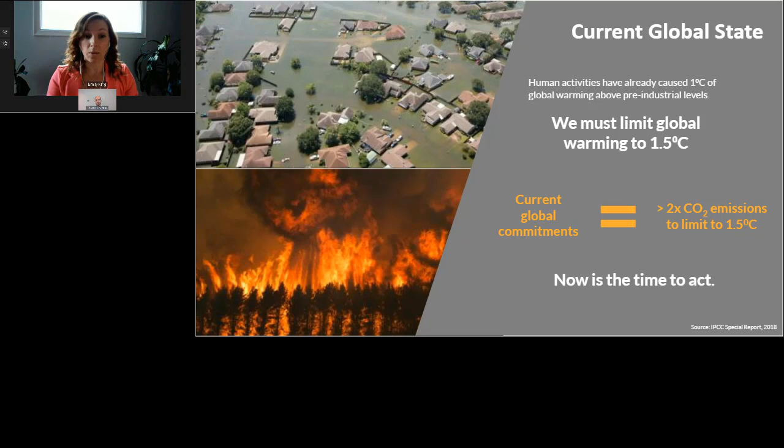So we know the planet's warming, we know we need to limit the warming to 1.5 degrees, but what does that mean for emissions reductions? So the IPCC report indicates that we need to reduce those emissions to 25 gigatons of CO2 equivalent by 2030, which is a 45% decrease from 2010 levels. And we need to be net zero by 2050 in order to limit global warming to 1.5 degrees increase above pre-industrial levels. So that means that we need to have a 7.6% decrease in emissions every year in this decade.

And for perspective, due to COVID in 2020, we saw a 6.4% decrease in emissions globally, but it's not expected to last. So this graph shows our emissions in 2015 and our current trajectories. And so even if we achieve the goals set out by each nation, we're still going to be 29 to 35 gigatons short, which is more than double what the recommended amount is for 2030. And in 2019, we saw a total of just over 59 gigatons of CO2 equivalent emissions. So as you can see, this is even higher than what the scenarios had predicted.

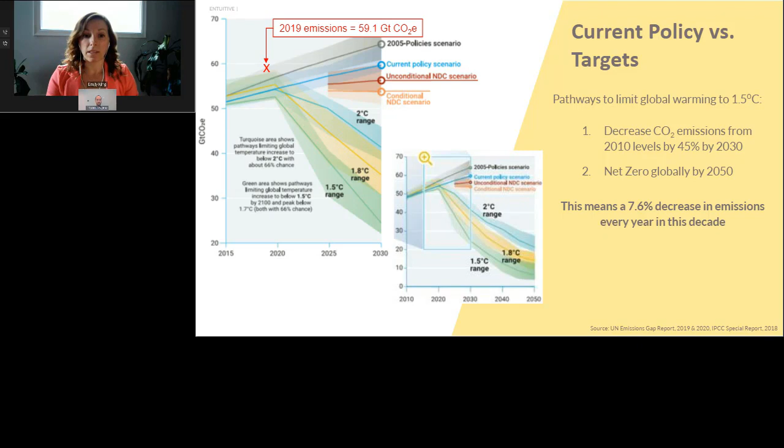So we need to cut emissions by over 50% if we're going to reach the 2030 target based on 2019 levels. And pathways to get us there are going to require rapid and far-reaching transitions in multiple sectors, but a big one is buildings and transportation. So the good news is that we can actually do something about all of this. A global low-carbon recovery from the global pandemic could cut as much as 25% of GHG emissions from the pre-COVID policies, which would put us more in line with the 2 degrees pathway, but more work would be required to reach 1.5 degrees. And then secondly, as professionals of the built environment, we have a really big role to play in reaching those emissions reductions targets.

So there is hope. So the graphic on the right shows buildings account for almost 40% of global greenhouse gases. So 28% are operational. This accounts for the carbon emissions associated with building energy consumption. And 11% are embodied, which is measured as global warming potential. And this accounts for carbon emissions associated with the manufacture, transport, and installation and demolition of construction materials.

So the portion associated with the operational carbon is expected to significantly decrease in the coming years as buildings continue to have better operational performance, which means that embodied carbon is going to start to occupy a much bigger piece of that pie. And then further to that, in order for us to be on track for net zero buildings by 2050, the direct building CO2 emissions will need to be cut in half by 2030. So we've definitely got work to do.

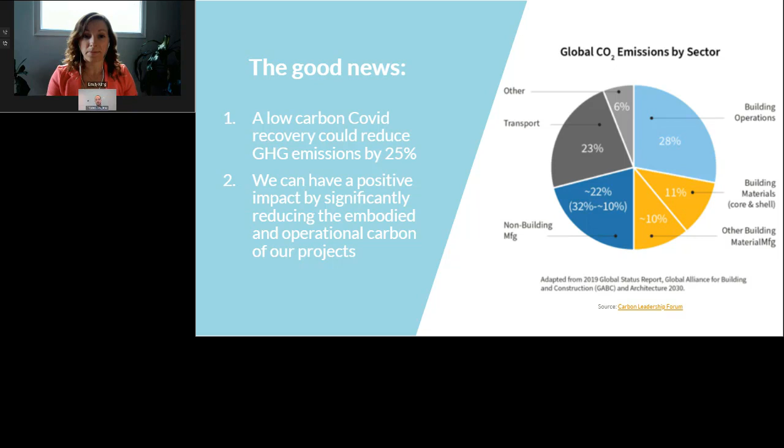So knowing that the built environment accounts for a large share of the total carbon pie, we need to make sure that our buildings are designed and built with sustainability in mind from start to finish and beyond. And a big hurdle to adopting sustainable buildings is not knowing what all the benefits are. What's the payback? What's the return on investment? And what are the drivers and motivators for stakeholders?

Well, for starters, sustainable buildings in most cases with a green building certification are valuable assets. They can have sale prices that can be up to 30% higher. Rental rates can be up around 25% higher, and occupancy rates can be up to 23% higher. Secondly, there are large operational savings for building owners and operators through things like energy and water use reduction.

The Canada Green Building Council published a really great study looking in the Canadian context for making the case for building to zero carbon. And they found that on average, a zero carbon building can provide a positive financial return of 1% over a 25-year life cycle, inclusive of carbon pricing, and requires an 8% capital cost premium. But as the cost of carbon increases, the financial return is just going to grow for a zero carbon building. And the study also showed an average of 24% annual operating savings and 91% emissions savings from on-site measures.

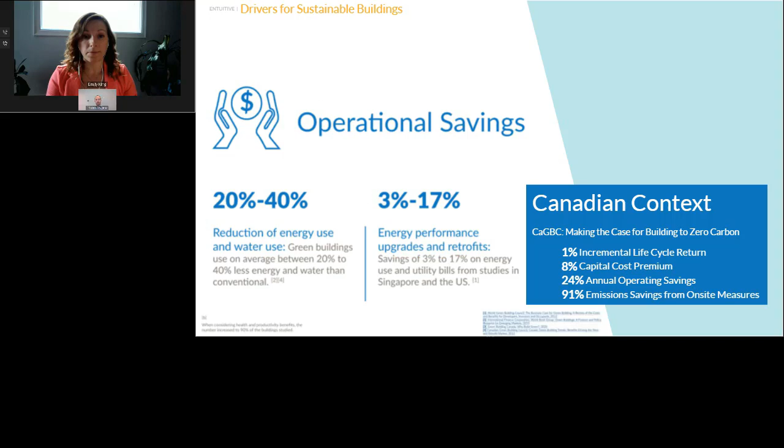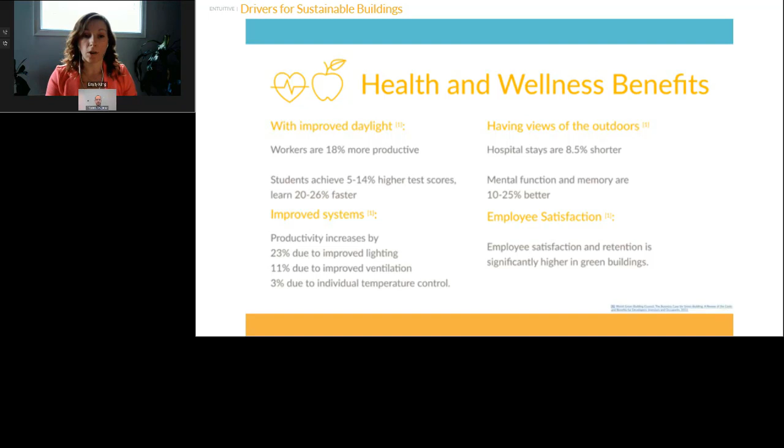There's also numerous health and wellness benefits to sustainable buildings, something which seems to finally be getting the attention that it deserves. So having improved daylight systems and views of the outdoors can positively impact things like worker productivity, student performance, mental health, function, and memory, and overall improved employee satisfaction and higher retention. So these should be big bonuses for owners, operators, and corporate tenants, since there's dollar savings on top of the overall improved human health and experience.

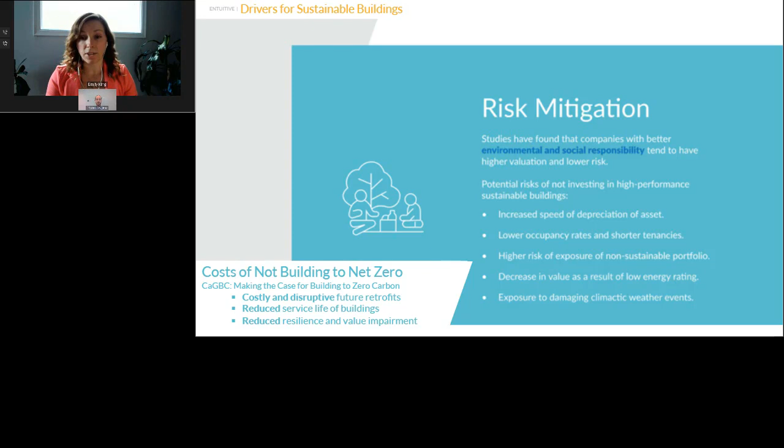And then finally, and very importantly, it's important for asset owners to reduce and mitigate their exposure to risks. So studies show that companies with higher goals and actions for environmental and social responsibility tend to have higher valuation and lower risk. And in the CaGBC study, they found that some avoided risks from building to net zero include things like avoiding costly future retrofits that will be required in order to meet Canada's greenhouse gas reduction targets.

So in addition to all those drivers for sustainable buildings and pushing for net zero, another big driver for clients is changing policy, legislation, and standards. So I'll pass it over to Tristan.

Yeah, thanks, Emily. So, as you pointed out, those are all some really excellent motivators to pursue high-performance building design. But something that's a little bit more stick than carrot is the levels of energy efficiency that's mandated by codes and standards currently in place and constantly being redeveloped. When we talk about achieving our decarbonization targets to limit warming to 1.5 degrees C, it's important to appreciate that implicit in that goal is the zero carbon operation of the entire building sector by 2050.

So to achieve this goal, jurisdictions around the world have been adopting increasingly stringent building energy codes. By 2030, all new buildings that we design are going to be required by code to achieve a net zero level of performance. So for those of you practicing in Alberta who might feel that the move to NECB 2017 was the last big move in energy requirements, you need to be ready for some similar jumps to continue coming over the next decade. This is one of the key reasons, as Emily mentioned earlier, why a shift in focus to embodied carbon is becoming necessary, as with the implementation of these code requirements, the greenhouse gas emissions associated with building energy consumption, or operational carbon, is really going to continue to decrease in the coming years.

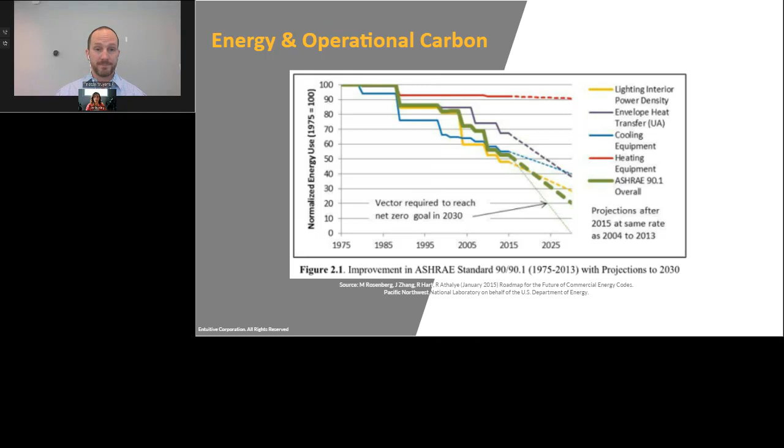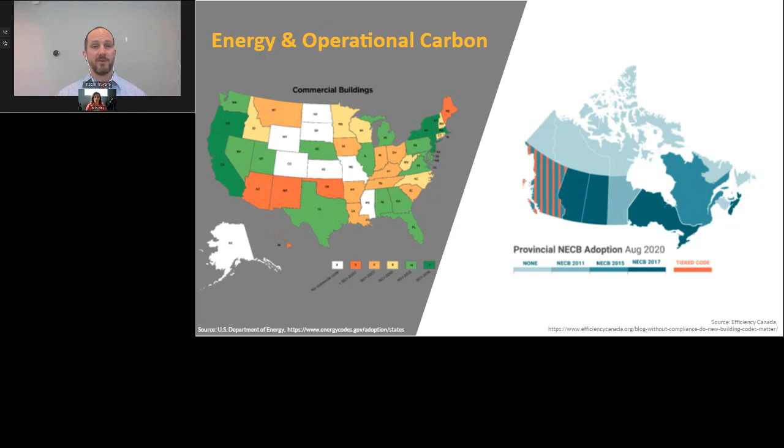So where I'm speaking to you from today in Toronto, the Toronto Green Standard is on this kind of a track, mandating increasingly stringent levels of performance with updates every 4 years. The next of these is coming on January 1st, 2022. So there's definitely a pretty big shift in expectations coming. And forward-thinking design teams are already positioning themselves and the designs that they know they're going to deliver in the coming years to be ready for this.

There's a laundry list of other municipal standards that are all trying to tackle the same basic idea, which is really how to achieve that carbon neutral built environment by 2050. And while these local mandates vary depending on the city that has enacted them, they generally include a mandate for net zero new construction by 2030 with an aggressive approach to the retrofit market for the subsequent 20 years leading out to 2050.

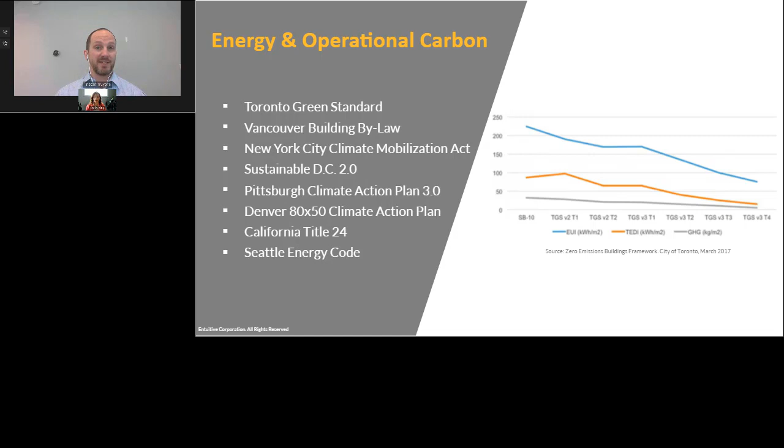So figuring out a way to design to this standard, to this level of high performance, is going to be table stakes for projects in most major markets very soon. And the firms that can figure out ways to do it efficiently and effectively are going to be in the command position.

But with all this talk about building codes, I like to throw this provocation out there, which is intended to ruffle a few feathers, but it's important to remember that our current energy codes, no matter how aggressive they may seem, are developed to identify a worst acceptable scenario of building design and really aren't intended to be aspirational by any means. And I like to make the provocation to encourage reaching for those aspirational targets, because architecture and building design, not unlike yoga or the law, is based on practice.

It's a body of knowledge that is developed from continually repeating the successes of the past, but as of right now, we don't really have a past that performs the way we need it to in order to address the climate crisis. So it's important that we try to push as far as we can today so that we can learn the lessons necessary to achieve the performance requirements that we have for tomorrow.

So then on the embodied carbon side, for the most part, codes and legislation are behind where they're at for energy and operational carbon, but they're not that far behind. So in the last couple of years, there's been a significant push and raising of awareness on the need for governments of all sizes to implement policies for reducing embodied carbon.

So in Canada, we can look at Vancouver's commitment to reducing embodied carbon by 40% by 2030 through their Climate Emergency Action Plan. In Quebec, they require an analysis comparing greenhouse gas emissions for structural materials in provincially funded new building projects. And the Township of Durham provides applicants with a grant opportunity for projects with embodied carbon emissions below a fixed target to reward builders for reducing embodied carbon.

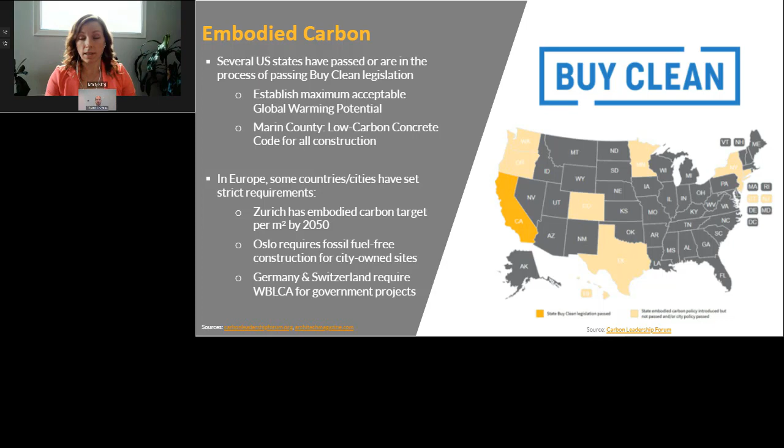And then there's also several examples across Europe. So there's many cities that have already implemented measures to reduce embodied carbon. For example, in Zurich, they have set embodied carbon intensity limits to meet 2050 targets. Oslo requires construction sites to be fossil fuel free, and Germany and Switzerland require whole building life cycle assessments to be performed on all government projects.

So with an understanding of why one should choose to pursue and occupy a low carbon sustainable building, and understanding the policy drivers pushing us towards a low carbon future, let's take a look at what makes up that actual carbon picture. Whole life carbon is made up of embodied and operational carbon.

So basically, we can no longer just focus on the in-use or operational carbon stage of the life cycle. We need to address carbon throughout the entire life cycle and look at the whole carbon picture. Life cycle assessments are a really useful tool to measure carbon emissions over the life of a building or product, and there are various programs that exist to help with this, such as One-Click LCA, Tally, and Athena Impact Estimator.

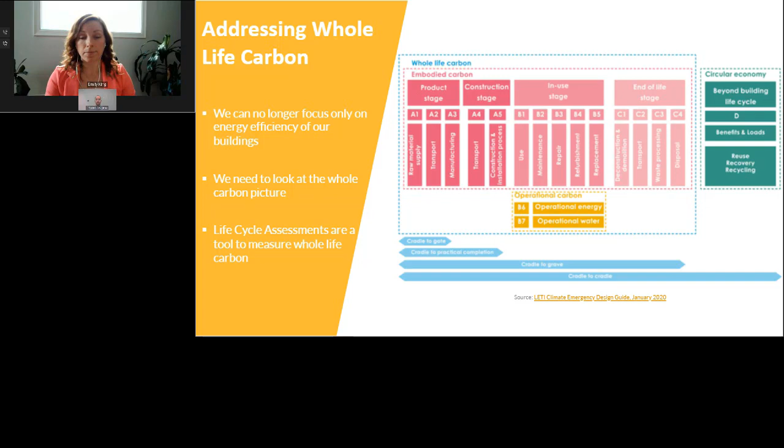In order to actually get to net zero emissions, the sum of embodied carbon, operational carbon, and avoided emissions has to equal zero. Ideally, we would get embodied carbon and operational carbon down to net zero on their own through things like carbon smart materials and construction practices and renewable energy. But until we get to that point, we need to offset the emissions of our buildings by either purchasing carbon offsets from a reputable certified organization or program, or through exported green power and renewable energy certificates.

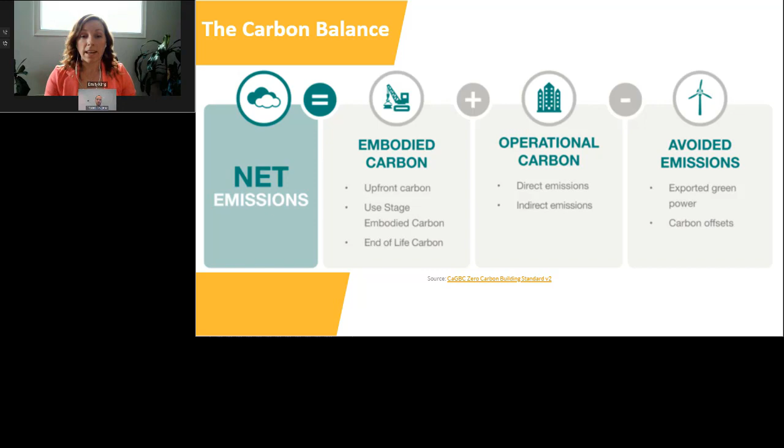So there's a real time value with carbon. The important thing to know is that you can't take back those emissions, and the majority of them come from upfront emissions before anything is even built on site. The graphic on the right shows that upfront and construction emissions are the bulk of embodied carbon emissions, and they take place before a building is even operational.

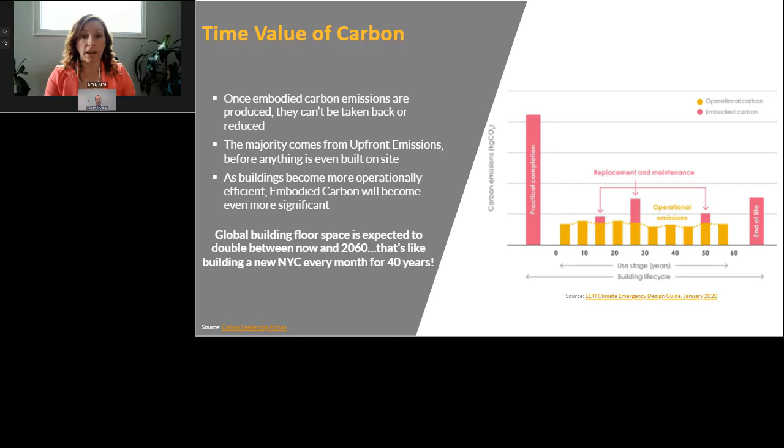Embodied carbon is becoming ever more significant as our buildings become more operationally efficient. Based on a business as usual approach, by 2030 around 74% of building emissions will come from embodied carbon. With the increasing operational efficiency of buildings, by 2050 embodied carbon will represent about half of the pie. Shockingly, global population growth is anticipated to result in a doubling of building floor space between now and 2060, which is like building a new New York City every month for 40 years. There's no doubt we have to make sure our designs are focused on reducing both operational and embodied carbon.

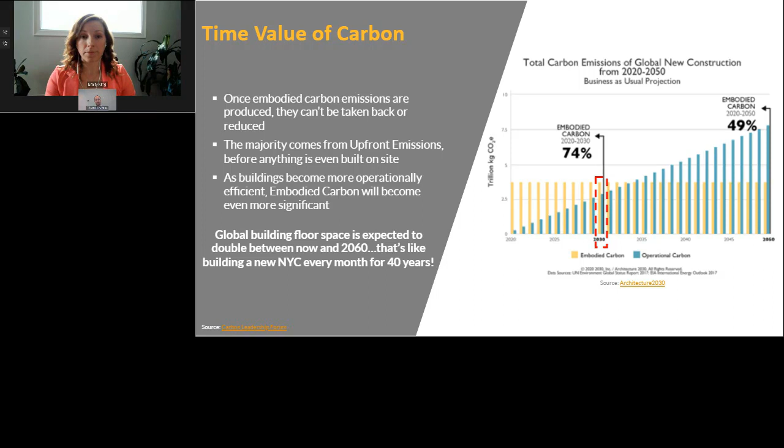Thanks, Emily. Clearly, getting to truly zero carbon buildings requires us to focus on both sides of that carbon balance equation. We've made some really great strides in the performance and energy efficiency of our buildings in the last few decades, but we're still a long way off from being able to fully electrify all of our heating needs and meet that load with renewable energy, which, if you think about it, is really the ultimate end goal we're talking about here in terms of building performance.

So in order to help ensure these reductions in operational carbon can be achieved, we need to rejig our approach to how and when we are thinking about building performance and applying building performance analysis throughout the design process, so that design decisions to limit operational carbon can be made with confidence.

The term performance analysis has been used pretty intentionally here instead of the more common energy modeling, as it appropriately sets the boundaries of the service beyond just an energy accounting exercise. Energy modeling, as it has traditionally been applied on projects, has generally been focused on the energy consumption of an entire building. Depending on project complexity, this can be a very time-consuming undertaking that relies on fully developed details about the design of various building systems.

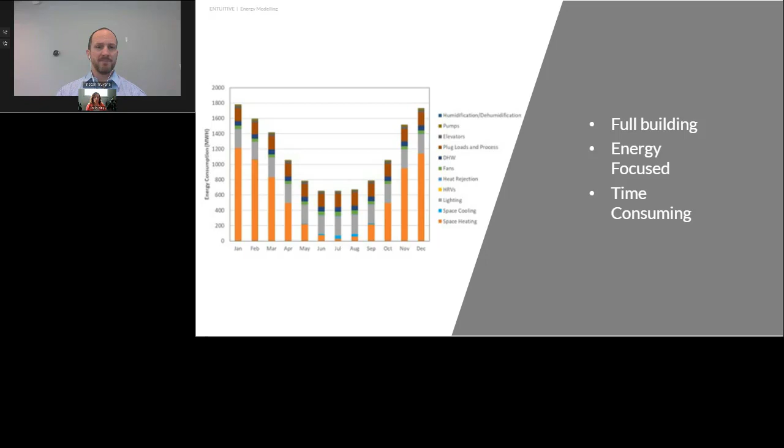As such, delivery of energy models has tended to be reserved for demonstrating compliance to third-party standards and building codes. In fact, today that is still how I would say the bulk of models are delivered in the design world. This adds little to no value to the design process beyond securing a building permit, which can often cause energy modeling to be seen more as a cost burden to be minimized for project teams.

So by reframing to the concept of performance analysis, it really extends the reach of simulation to help inform decision-making throughout the entire design process. This allows us to examine things like how a building's massing can influence natural ventilation or renewable energy generation potential, or how window areas can be optimized for the ideal ratio of daylight access and thermal transmission.

Answering questions like these is soon to become very commonplace as we migrate into a world where we need to achieve net zero performance for every building. And I have to stress that again, it's really every building. It's not the boutique institutional building or the A-class building at that university or this office park. It's really across the board, every building needs to hit net zero.

So how do we need to approach the design of buildings to achieve extremely low carbon operation? Now, some or many of you may have seen some variant on this sustainable design pyramid in the past. I'm certainly not claiming any copyrights to it, but I like to come back to it as it really presents a 10,000-foot view of what our design approach for high performance needs to be.

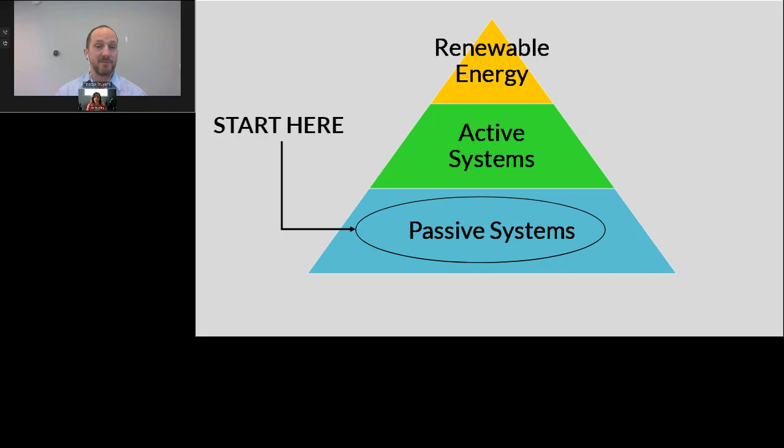Clearly the more common energy modeling accounting paradigm is not set up to enable or assist in this matter of design thinking. So for an effective performance analysis process to support the design of buildings with extremely low operational carbon, it really needs to be based around three key pillars: the ability to move at the pace of design, the provision of clear graphical communication of results that can help augment design decision-making, and integration throughout the design process. Now, that first pillar is a crucial one.

An architect and former colleague of mine is very fond of saying that energy modelers come in two types: the bad and the slow. In the early stages of design, design teams need answers in a matter of hours, perhaps a few days, but certainly not the couple of weeks that it could take to build up a fully integrated energy model.

So one way of addressing this is to work with design teams in an integrated fashion to make sure that we, the performance analysis team, are asking the right questions to inform design. There's a variety of different simulation types that can be run that are very lightweight and quick to set up—things like treating the building as a simple shoebox, or simulating just a single critical zone for a very specific performance aspect—and things of this nature allow for a very rapid turnaround.

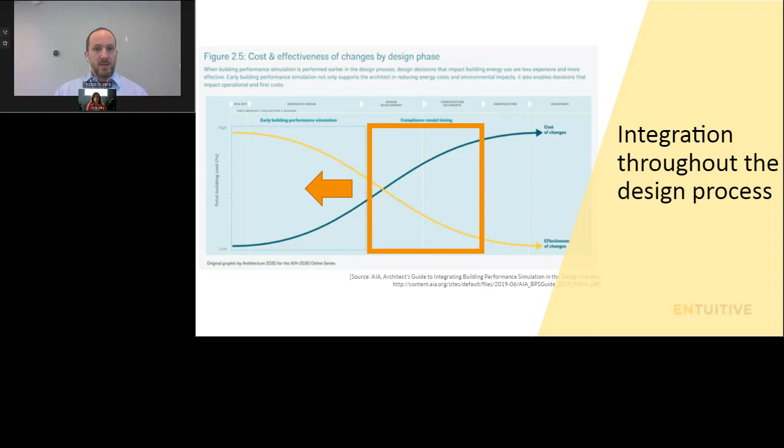So hopefully I've painted a picture of how performance analysis can elevate a design team's ability to achieve their low carbon goals. But minimizing operational carbon is rarely achieved by accident, and you can't hit a target that you haven't defined. So when starting out any project, it's important to understand what you are shooting for by setting building performance targets to help keep design activities focused on the desired result.

Now, these performance targets can come in many forms, each of which have their own role to play. Absolute targets are what we're starting to see with codes like the Toronto Green Standard, Vancouver Building Bylaw, and the BC Step Code. They set a specific threshold for the performance of design. For example, this office building must have an energy use intensity less than 110 kilowatt hours per meter squared, something of that nature. It's a fixed number that all buildings have to comply with.

Relative performance metrics, on the other hand, are what underpin energy codes like the NECB and ASHRAE 90.1, and are probably quite familiar to anybody who's gone through a LEED process or worked with either of those codes. They involve setting a target relative to a fictitious baseline building of some kind, and you tend to report results to these types of standards in the form of: the building performed 10% better than the prescriptive baseline set by the NECB.

These targets are actually far better suited for work on existing buildings than new construction, because there you can have a historical baseline of the building's actual operation that can be used instead of the moving target that's created by an energy code. Now, targets don't have to just be about energy.

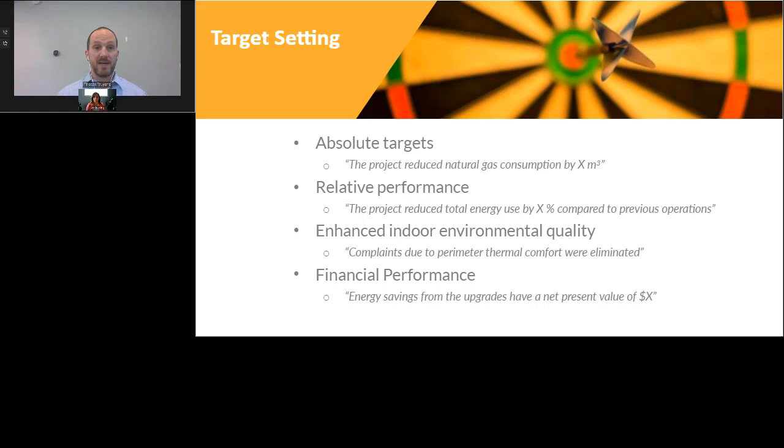So while we're speaking about targets, I wanted to do a little bit of jargon busting to clarify a few of the most common metrics for building performance being used today. So these are the metrics that are used to set the performance thresholds for those codes using absolute metrics to guide projects towards zero carbon.

And the first of these metrics I've already mentioned loosely is energy use intensity, or EUI, sometimes referred to as total energy use intensity, or TEUI, but regardless of the T, is essentially a miles per gallon rating for a building. It takes the total energy consumption of the building for a full year, combines all energy sources into one number and common units, and then normalizes by floor area.

It's a really handy metric for comparing buildings against one another, but care needs to be taken to only compare EUIs between buildings of the same type. A high-performance hospital will have a substantially higher EUI than a very average warehouse. It also says nothing about carbon emissions, so it doesn't really tell the full story about a building's environmental impact. But when you come back to that end goal of eventually all energy consumption being electrified and met with renewables, the reason for driving for a low EUI starts to become pretty clear.

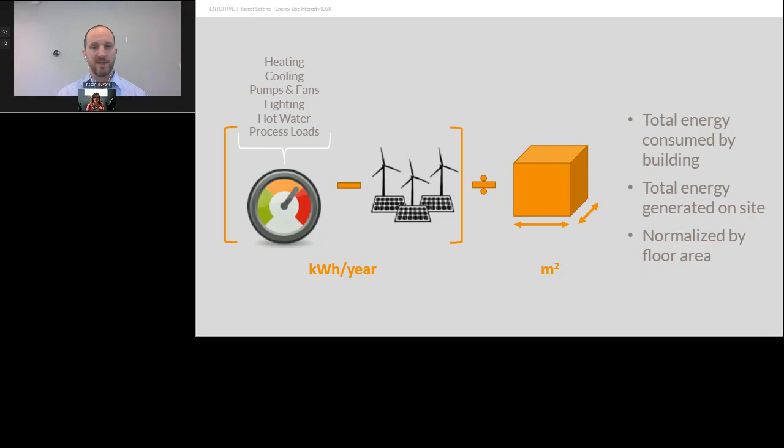Thermal energy demand intensity, or TEDI, has its roots in Passive House and is the metric that is giving mainly residential designers the most grief these days. As a metric, it measures the total amount of heat energy that is lost through the building envelope, as well as the amount of heat energy that must be input to ventilation air, and again, then normalizes by floor area. The absolute energy codes in places like Toronto and BC, as well as the Canada Green Building Council's Zero Carbon Building Standard, all carry strict requirements for TEDI.

And the reason that TEDI is so disruptive is that it is essentially independent of the mechanical system, particularly in residential typologies. So where in the past, HVAC efficiency could be relied on to compensate for poorer envelope performance, having a TEDI metric makes that no longer the case. It's also that by focusing specifically on heating-related end uses, TEDI mandates are really intended to directly drive reductions in natural gas usage.

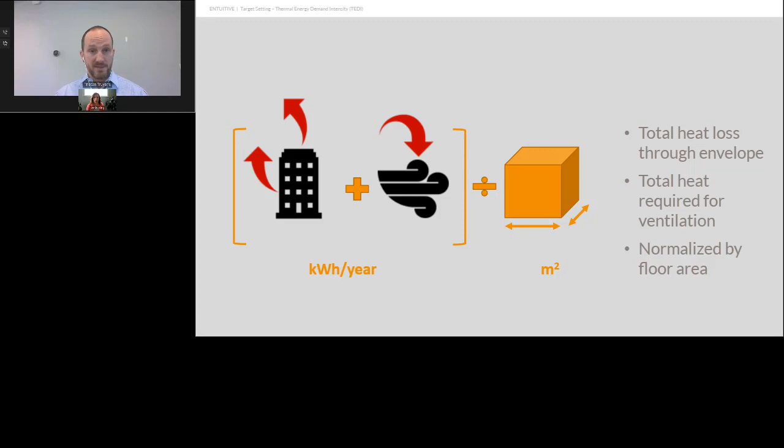So the third metric that I wanted to talk about, greenhouse gas intensity, or GHGI, is exactly as it sounds and is the metric that speaks directly to the operational carbon side of that carbon balance equation. This metric is required by the Toronto Green Standard, as well as being the basis for Local Law 97 in New York City, which is addressing greenhouse gas emissions from existing buildings and providing absolute limits that they have to meet by certain calendar dates. It requires the conversion of the amount of fuel consumed, typically electricity and natural gas, into total tons of CO2 emitted for each. And then, as with all the others, adds together and normalizes by the building floor area.

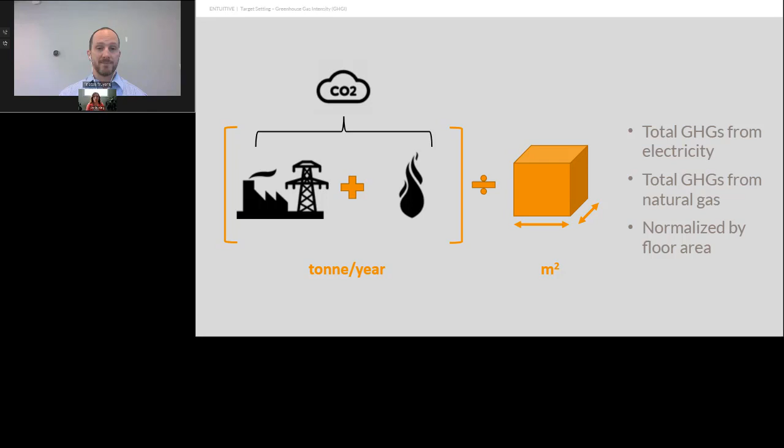Now, your GHGI is going to depend heavily on the local electrical grid, which is why a building in Calgary with the same EUI as a building in Montreal is going to have a strikingly different greenhouse gas intensity. But there's really only one target that we need to be thinking about, and that's zero. We as the designers, constructors, and caretakers of the built environment need to find a way to get the operational carbon emissions associated with our projects to zero in the next few decades. And we need to become very deliberate in what we are trying to achieve, as this is a very aggressive paradigm shift that is being described.

And so with that, I'd like to turn things back over to Emily to discuss what can be done during the design process to help reduce that embodied carbon side of the carbon balance equation as well.

Oh, still on mute. So now we're going to dive a little bit deeper into embodied carbon, as Tristan mentioned, and focus on some strategies for reducing it for structure and envelope. So the World Green Building Council's Bringing Embodied Carbon Upfront document provides a clear guideline and timeline for what various stakeholders need to and should be doing to address embodied carbon. And it's going to take the efforts from many different groups and organizations in order to get to net zero embodied carbon by 2050.

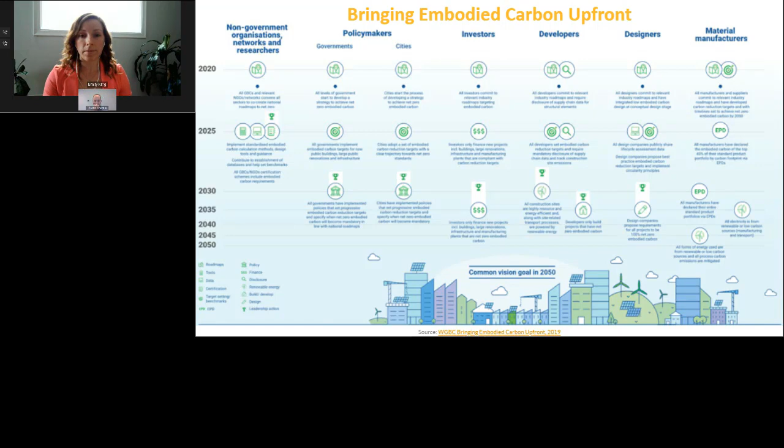So again, when we're talking about embodied carbon, we're talking about these emissions that are associated with the materials that go into building our buildings, and they happen across the whole life cycle of a building or structure. And there's the upfront emissions, which are the majority of the embodied carbon emissions, but then you've also got in-use emissions and end-of-life emissions as well. But the biggest culprits typically for embodied carbon come in the form of structure materials and envelope materials.

So we all want to know what we can and should be doing to actually reduce the carbon on our projects. And that Bringing Embodied Carbon Upfront publication provides really fantastic guidance on the required actions. So from the graphic on the right, in order to have the most impact on reducing carbon, of course, the best option would be to build nothing and instead look for suitable alternatives. And then if building is required, the next thing would be to explore options for reusing existing structures and materials. And then when designing, optimize as much as possible to reduce the new materials and to use low carbon materials. And then during construction, build as efficiently as possible.

So one design approach for reducing embodied carbon would be to make design decisions that would result in reduced material quantities. Because again, if we can reduce those material quantities, we're reducing the amount of embodied carbon associated with those materials that are going into the building. So this could be done by things like reducing grid spacing and floor-to-floor heights, optimizing the loading requirements and patterns, and reducing the overall weight of the structure to reduce the concrete in the foundations.

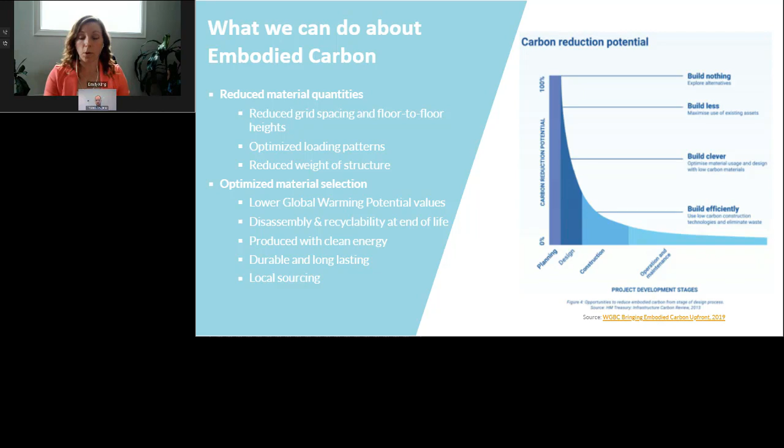So concrete is one of the most widely used and carbon-intensive building materials on the planet, and it currently accounts for about 6 to 10% of global greenhouse gas emissions. Cement is one of the smaller components by volume, but it takes the cake on carbon emissions for concrete. So cement production, particularly the component called clinker, accounts for the big share of the emissions. So clinker is produced in a kiln at extremely high temperatures that's most commonly fueled by fossil fuels, and that accounts for about 40% of the emissions. And over 50% come from the actual chemical process of creating this material, which releases CO2 as a byproduct.

And then on top of that, there is a global sand shortage, since the sand that's used in concrete production comes from rivers, lakes, and seashores, not deserts where the grain is too smooth and round, and therefore it's not good for interlocking. So the overwhelming conclusion is that we need to reduce the amount of cement in our concrete mixes, and we need to find suitable alternative aggregates.

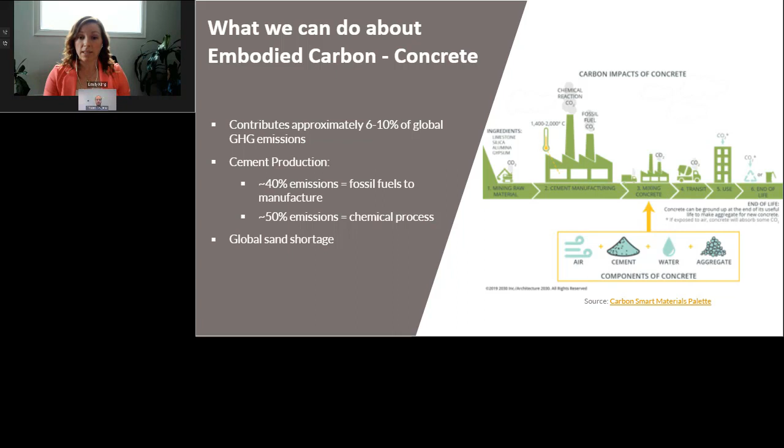There are several strategies that exist to make a concrete less carbon intensive. And a few key ones to work with: your structural engineer could be specifying Portland limestone cement wherever possible, which will result in approximately 10% reduced global warming potential. You can increase the SCM content, the supplementary cementitious material content, with slag, fly ash, or other SCMs, which can have the result of increasing the set time. So try to specify 56 to 120 day strength where possible, such as in the foundations, or work with a concrete manufacturer to develop a high SCM mix which won't delay set time.

You could use carbon capture technology for concrete and aggregates, such as technologies like CarbonCure and Blue Planet, which embed post-industrial CO2 into the material. And in the case of CarbonCure, the result is a reduced cement content since the same strength is achieved. You can also specify low carbon concrete mixes from local producers. They're all starting to develop these mixes, which is really fantastic.

And you can use hard, durable aggregates to make sure the concrete does not degrade prematurely, and use recycled concrete aggregate in fill applications. And then you can try to select concrete manufacturers who are using a low carbon process, either through alternative fuels for combustion or different types of kilns that are less energy intensive. So just talk with your engineer or your concrete manufacturer about these options. And then finally, as I've mentioned, work with your local manufacturer. So that means reaching out to them or getting them on board really early in the design process.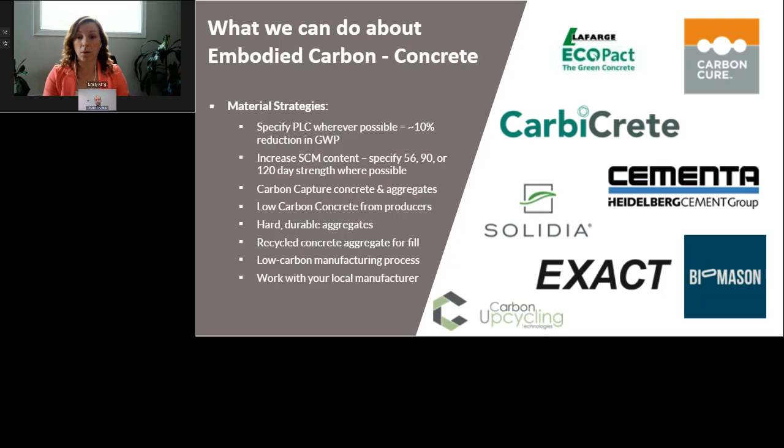It's also important to try to reduce material quantities as much as possible. So there's several framing and design strategies that can help with that. So you can reduce the weight of the overall building, which will also help to reduce the amount of concrete in the foundations. And this can be achieved through things like voided slabs or lightweight concrete, but you have to make sure that those options are not resulting in an increased embodied carbon elsewhere. For example, having more envelope due to the increased floor-to-floor height from having the voided slabs, or more cement content in lightweight concrete.

Another option could be to reduce the slab thickness. So typically, the largest share of a building's embodied carbon resides in the slabs. So anything that we can do to reduce thickness is going to help. And this could be through using post-tension slabs or smaller grid spacing. But again, you have to make sure that that increased number of columns from having the smaller grid spacing doesn't end up adding more embodied carbon. And this is something that can be checked through a life cycle assessment.

Another option would be to optimize loading patterns as much as possible. And then finally, ask for EPDs in specs to generate a demand for this information, and then perform life cycle assessments to get the full life picture.

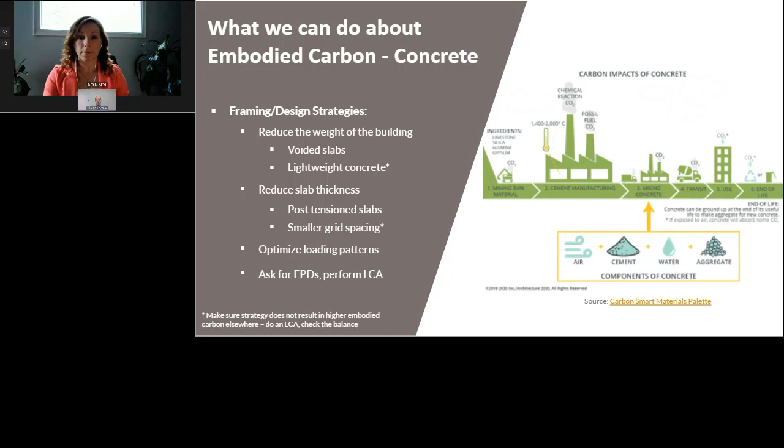By contrast, the electric arc furnace method can have up to 100% recycled content, though the average is about 97%. And it's powered by electricity, so it's ideal to look for a mill that's in a location with a clean grid. And steel produced from this method has the same performance as virgin steel.

There are also several material-focused strategies that can be employed to reduce the embodied carbon of steel on your project, such as specifying that the steel be produced via the electric arc furnace method in a location with a clean grid. Specify a high percentage of recycled content. Note that there are some owners and jurisdictions who are actually starting to require a minimum percentage of recycled content for their projects, such as Waterfront Toronto. You can use salvage structural steel wherever possible.

Using high strength rebar is another option with close to 100% recycled content. So it has the same global warming potential as lower strength rebar, but you can use less of it when it's high strength. And then reach out to manufacturers early in design to find out which ones can offer low global warming potential steel at a reasonable cost and availability.

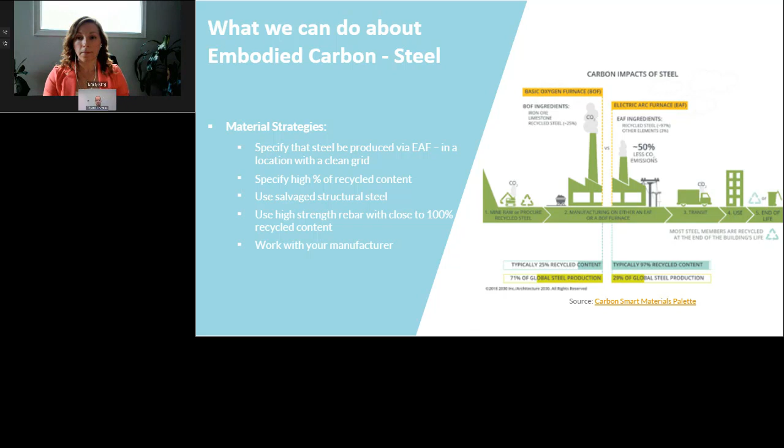And then on the design side, there are a few strategies that you can work with your structural engineer to achieve, such as using braced frames instead of moment frames, since braced frames tend to use less materials. You can use joists and truss shapes instead of rolled shapes. They are lighter, they can support the same weight as rolled shapes, and they can reduce the overall quantity of steel that's required. Right size as much as possible to avoid using excess materials where they're not needed.

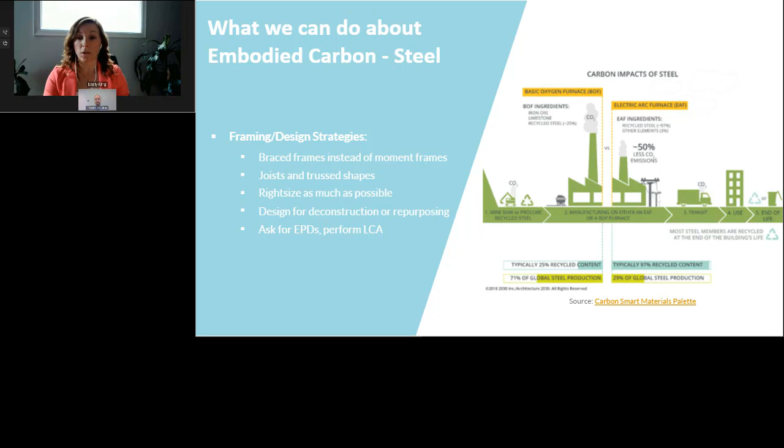And then a big thing is designing for deconstruction or repurposing to contribute to a circular economy and to make it easier for those members to then serve a new purpose at the end of the building's life. And then, of course, as I mentioned, ask for EPDs to drive that demand, and then perform LCAs to look at the design and material trade-offs.

And of course, trees sequester carbon as they grow, but we need to make sure that that carbon stays locked up in that timber for a long time, around 100 years. And we need to make sure that these members don't end up in landfill at the end of their life to release that CO2 back into the atmosphere.

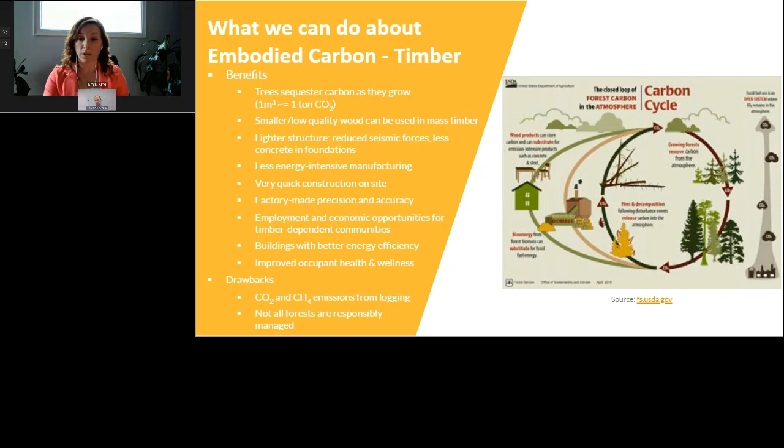So even with timber, we need to make sure that we're taking steps to still reduce the embodied carbon emissions as much as possible. Just because it could be a lower carbon material doesn't mean that we want to go crazy and just have tons of it.

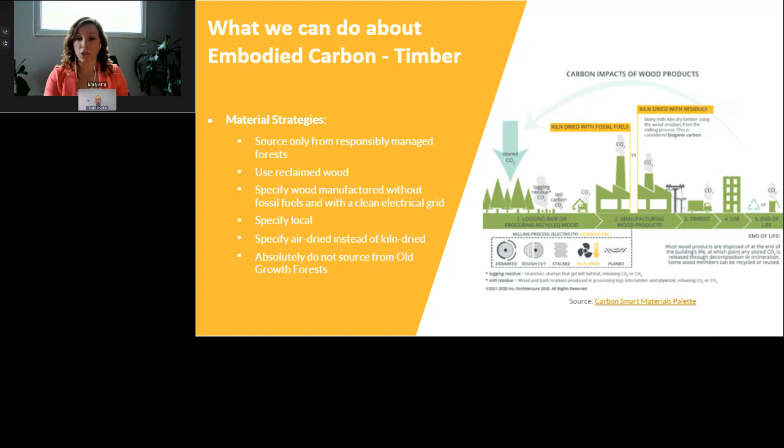So some material strategies include sourcing only from responsibly managed forests, such as the FSC certified forests, using reclaimed wood wherever possible and feasible. You can specify wood that's manufactured with electricity with a clean grid. You can specify local products where possible and feasible, and then you could try specifying air-dried timber instead of kiln-dried to avoid that energy-intensive process. And then above all, absolutely do not source timber from old-growth forests, which are extremely important carbon stores and support diverse ecosystems. So it's just really important to know where your timber is coming from.

And then some framing and design strategies to coordinate with your engineer could include reducing the grid spacing, but then of course making sure it doesn't result in a higher embodied carbon elsewhere, design for durability and protect that wood from moisture, heat, and pests throughout the building's life. Use the most efficient material for the job. So looking at dimensional versus engineered timber. Engineered timber has a higher global warming potential, but it can result in less materials. So it's important to check that balance with an LCA.

And then of course, design for a long lifespan, as I mentioned, around 100 years. Design for disassembly and reuse to promote circularity and avoid timber ending up in landfill or incineration. And use pre-manufactured assemblies where possible, which can result in using less timber than traditional framing techniques. And then of course, ask for EPDs, perform LCAs.

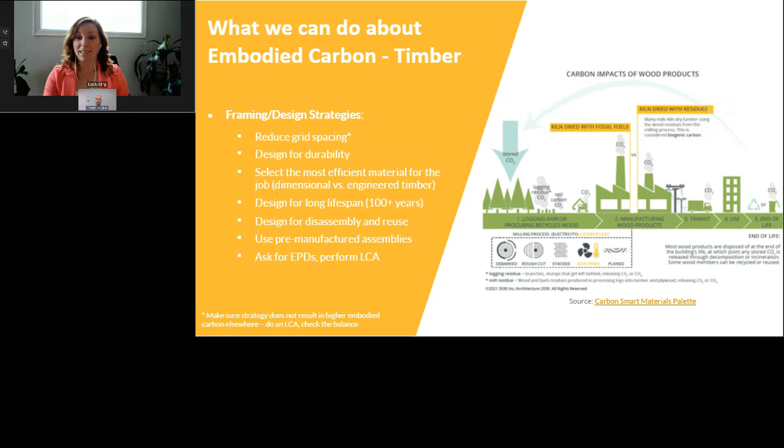So now looking at some envelope materials, it's important to remember that you have to balance the operational and embodied carbon emissions. So a system could have a higher embodied carbon, but it could result in a much lower operational carbon over the life cycle or vice versa. So it's important to do an LCA to check that balance.

In general, the big carbon culprits for envelope materials are insulation and aluminum. So insulation materials such as extruded polystyrene and closed cell spray polyurethane foam have an extremely high global warming potential. To reduce the emissions associated with insulation, it's recommended to use natural materials like wood fiber, straw, hemp, cork, or wool, or use cellulose high density blown-in insulation. And it's important to protect insulation from moisture to ensure durability and longevity.

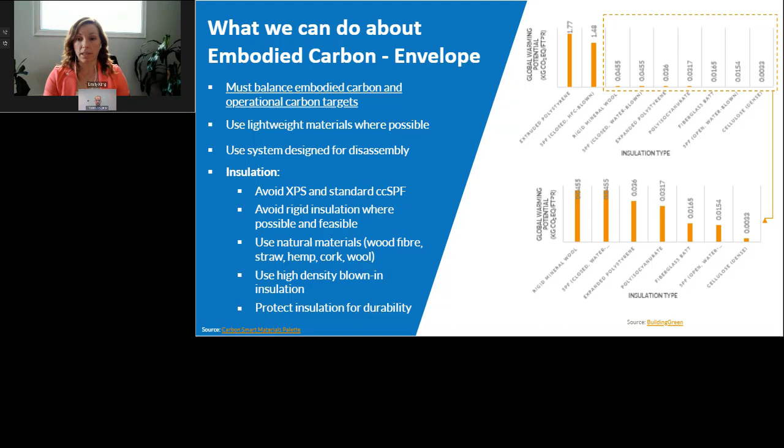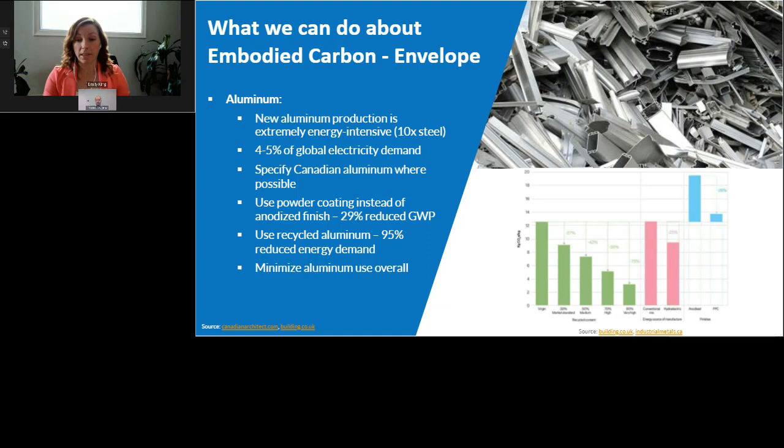So now we're going to go through a quick case study. We performed an integrated design case study of an existing 4-story office building in Calgary to use our integrated design framework in the context of trying to reduce carbon. We had several of our services involved in this process, and we wanted to look at this office building, which was already designed and built as a concrete structure with a curtain wall, but we wanted to take a look at it from this other lens and see what could we have done differently, what other strategies could have been leveraged to improve the design and also reduce carbon emissions.

So the baseline building was a concrete structure with a raft slab foundation and concrete flat plate slabs. And we looked at several different schemes, varying the grid spacing and the material type for structure. And for envelope, we looked at different window to wall ratios and material types. And then we also performed energy modeling in order to properly evaluate the envelope choices, looking at both operational carbon and embodied carbon.

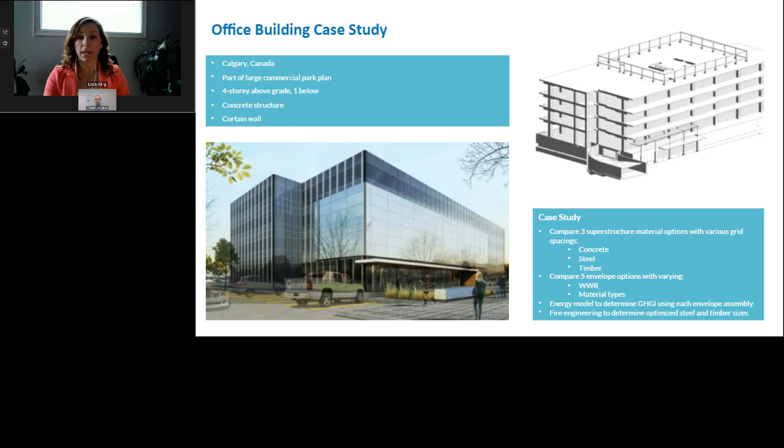So starting with the envelope, we looked at 5 different options. The differences between the cases were the assembly and the window to wall ratio. So the assemblies consisted of double pane and triple pane curtain wall, spandrel panels with over 5 inches of insulation, and opaque walls that were made up of a 1/2 inch of fiber cement cladding, studs, gypsum boards, and 4

inches of insulation. So the embodied carbon analysis primarily focused on phases A1 to A3, or the upfront phases, which is the cradle to gate. And additionally, we ran an energy model for all the different envelope systems to determine the energy consumption and the operational carbon associated with each one.

So we found that the optimal envelope assembly for embodied carbon relative to the baseline consisted of a 50% window to wall ratio with an opaque wall assembly. And then similarly, in terms of operations, we see that as the window to wall ratio decreases and as we introduce opaque wall assemblies, both the energy consumption and the carbon emissions decrease.

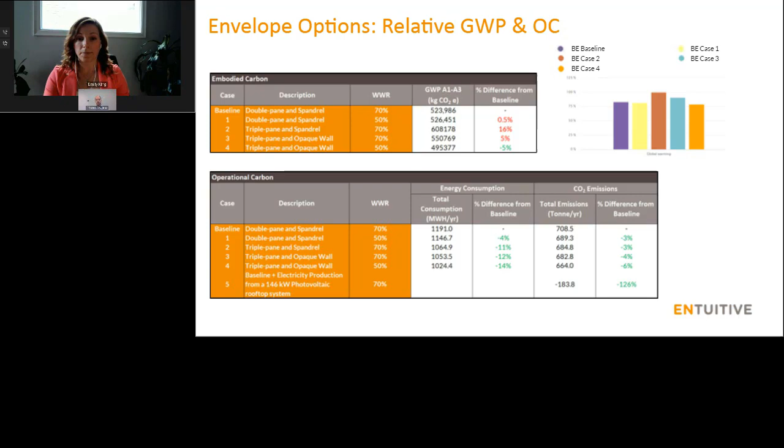So what were the most contributing materials for embodied carbon? Well, looking at the baseline, which is the worst case, case 2, and then the best case, which was case 4, and then ignoring the XPS insulation, which is consistent in all 3 cases because it's on the roof and along the foundation walls, we see that in all cases, the curtain wall has the highest carbon content. Even in case 4, when it consists of 50% of the wall area, it accounts for almost 50% of the total carbon emissions.

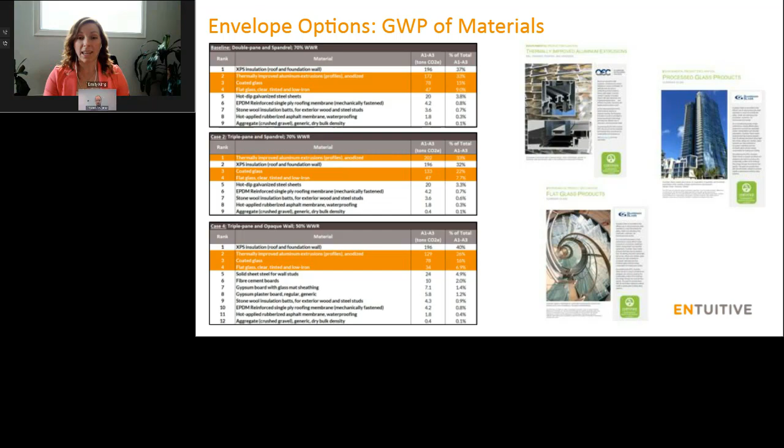And then looking at structure, we looked at the concrete baseline superstructure with both a raft slab foundation and an isolated or spread footing foundation. All of the other schemes used the spread footing foundation. And as you can see, there was a reduction in embodied carbon going with the isolated foundation option of about 15%. So that's the blue line to the pink line.

And then for each material, we looked at a 9x9 grid, a 7.5 by 7.5 meter grid, and a 4.5 by 14 meter grid. And overall, we found that the scheme with the lowest embodied carbon was a mass timber frame with a 7.5 by 7.5 meter grid and a 2-way slab design.

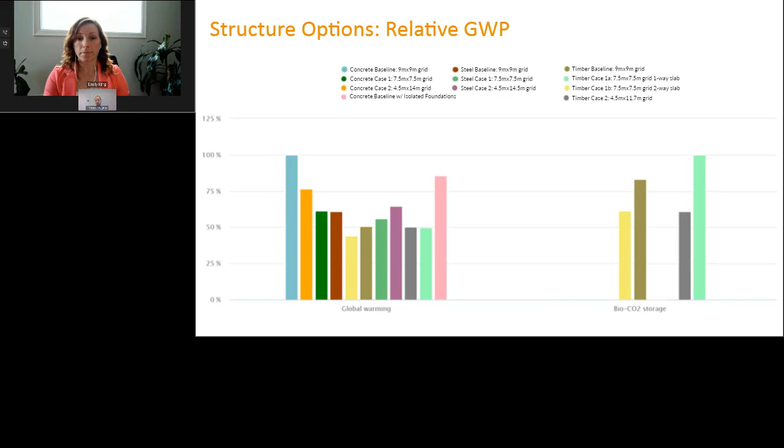And then when we look at the results broken down by life cycle phase, we see, not surprisingly, that A1 to A3, or again, that upfront phase, has the largest share of embodied carbon emissions. We didn't end up altering the default values for the rest of the life cycle phases in the software since we were primarily focused on A1 to A3, but the software does have default values for some of those other phases.

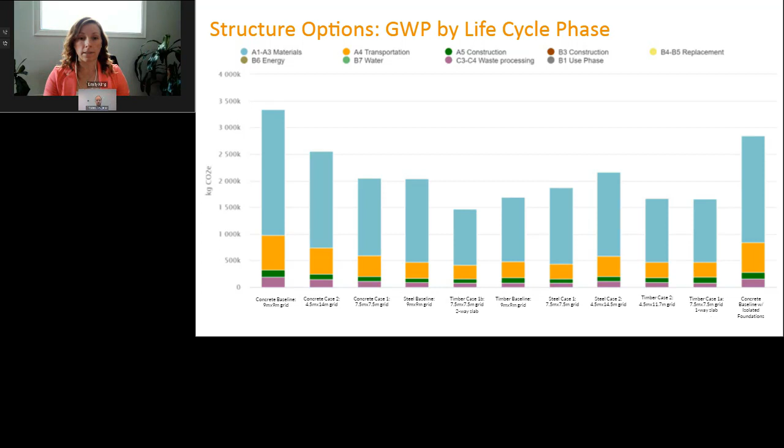And then when we look at the breakdown by elements, we see that the majority of the embodied carbon lives in the foundations and in the slabs for each scheme. So this whole thing just highlights the importance of looking for ways to reduce carbon in those elements as much as possible. It shows you which elements are the most carbon intensive and where you should be focusing your efforts to reduce carbon.

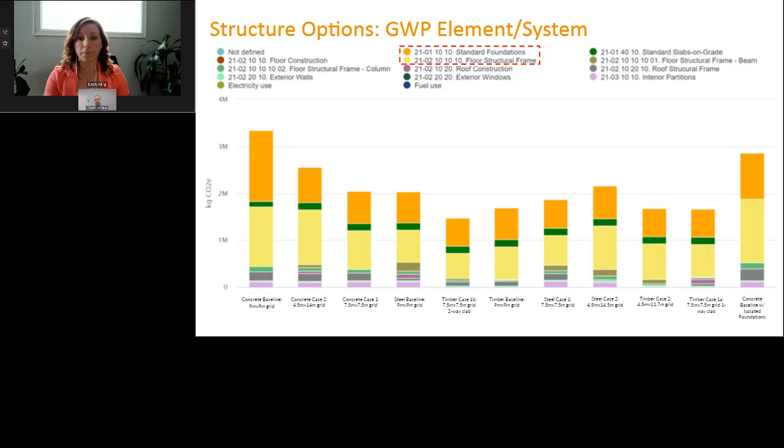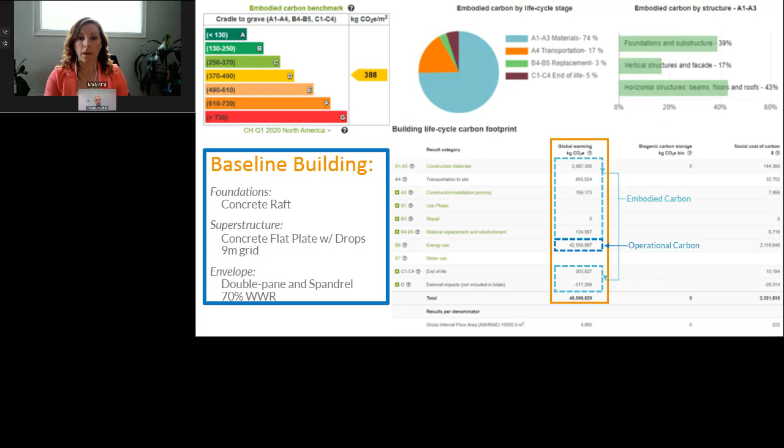So now looking at the lowest carbon combination, we've got isolated concrete foundations, a mass timber superstructure with a 7.5 by 7.5 meter grid with a 2-way CLT slab and glulam columns and beams. And the envelope was a triple pane and opaque wall scheme with a 50% window to wall ratio. So this ended up resulting in around a 45% decrease in embodied carbon per meter squared than the baseline scheme. So already that's a huge decrease.

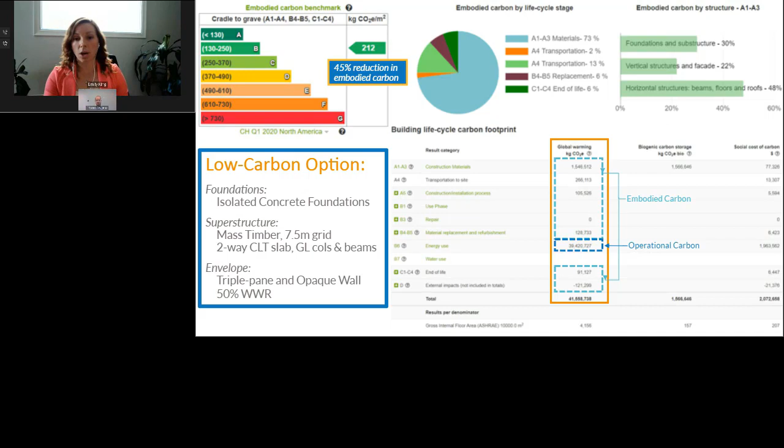But again, if we went with some other options like a higher SCM content in the foundations, for example, we could see a further decrease in emissions. And then for operational carbon, we saw about a 6% reduction over the life of the building. But again, this was just looking at the reduction in operational carbon for envelope impacts alone, not looking at mechanical and electrical efficiencies. And then due to the carbon intensity of the grid in this location, it's still quite high.

So importantly, when we look at the breakdown of emissions by life cycle phase, we see that ultimately the operational emissions are very significant due to the carbon intensity of the grid. Therefore, in addition to the focus on reducing embodied emissions, there should also be a huge focus on getting this building down to net zero energy or as close as possible.

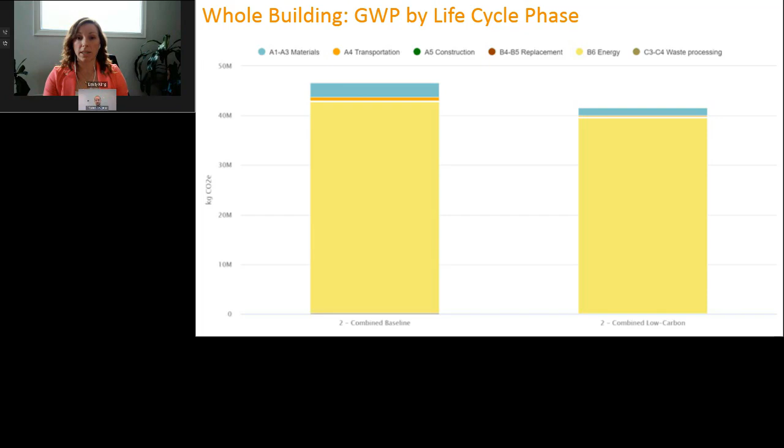And finally, we just wanted to show a few additional resources that we referenced in the presentation and that we highly recommend checking out to learn more about embodied and operational carbon and how to reduce them on your projects.